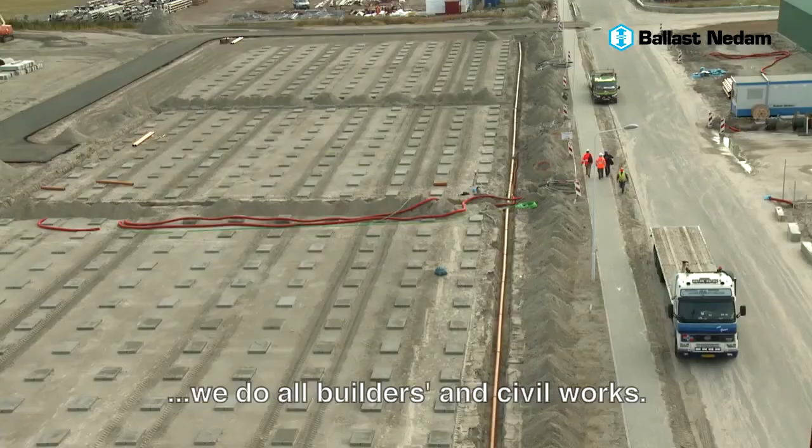Nuon is now part of Vattenfall, and this power plant is a very valuable asset in the Vattenfall portfolio. In fact, we build everything underground. We do all builders and civil works, also cooling water system. In fact, we connect the Mitsubishi turbine to the world.

I see Ballast not only as a pure construction company, but also as a service provider. Because Ballast already knows Mitsubishi's way of thinking, that's why we feel that Ballast is much closer to Mitsubishi compared with other European companies.

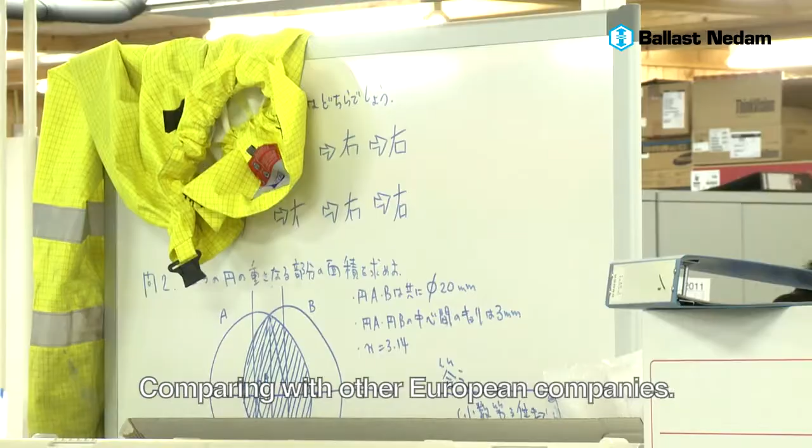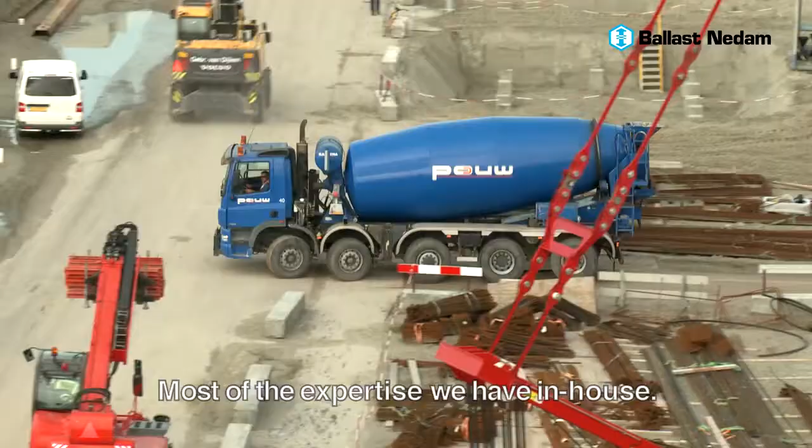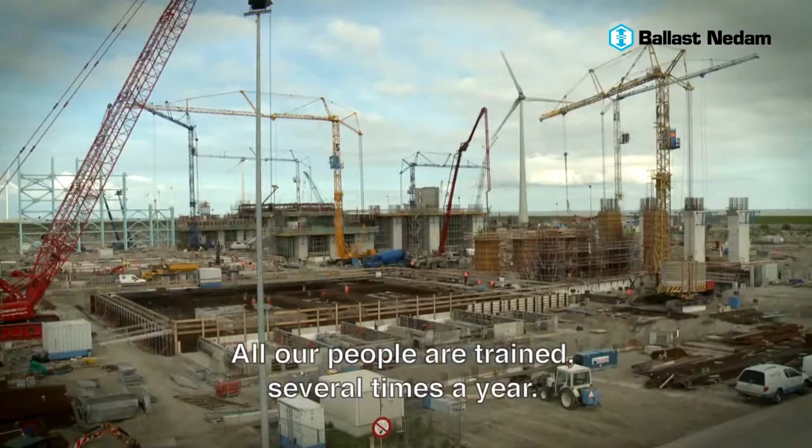We work with a limited amount of subcontractors. Most of the expertise we have in-house. At Ballast we have a severe safety program. All our people are trained several times a year, and we hope to achieve a perfect safety record at this project, because your people are the basis of a successful project.

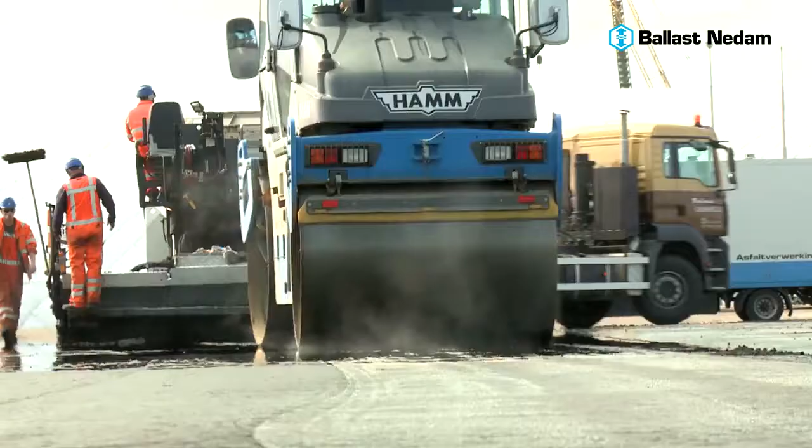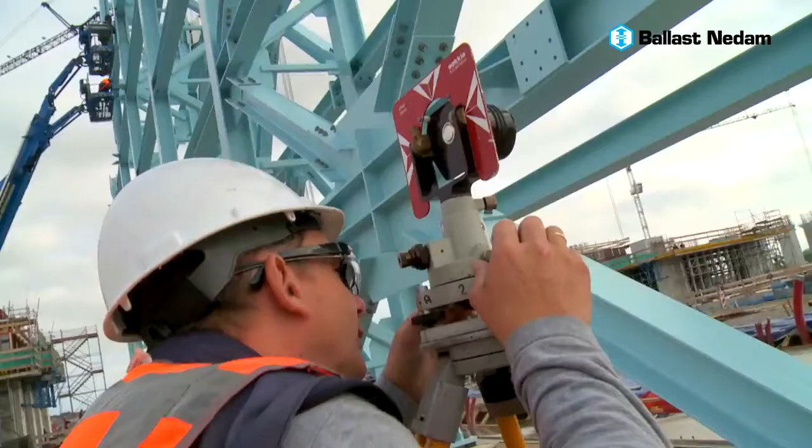Ballast is especially strong in cooling water systems. On that we have a very particular situation here, that we are very near to a nature-protected area, and Ballast was thinking together with us about the solutions for this system. All of the design works are carried out in cooperation with our client Mitsubishi. These works consist of the cooling water intake, the cooling water outfall, and the design works for the cooling water piping.

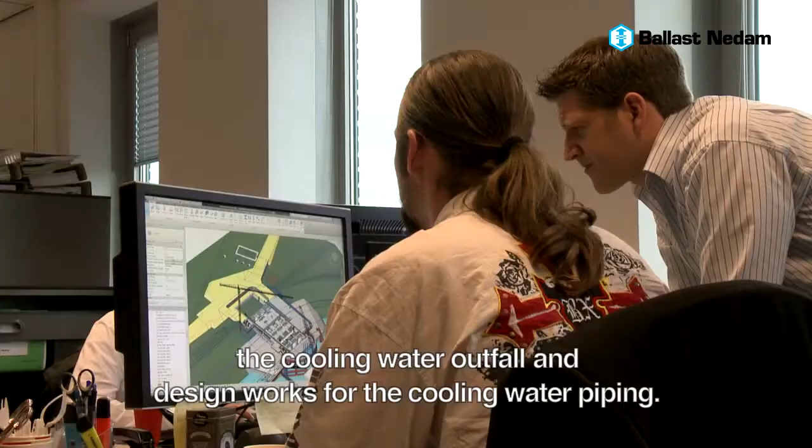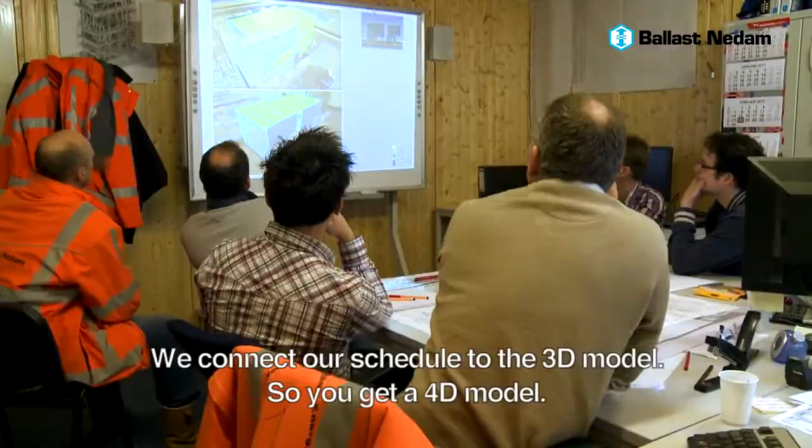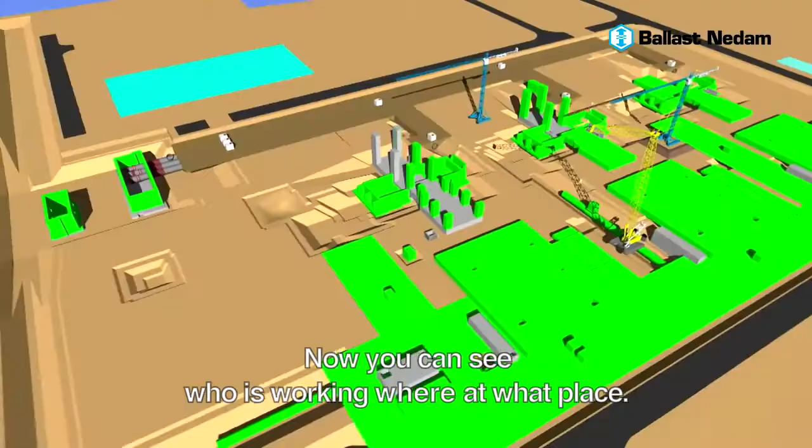We connected our schedule to the 3D model, so you get a 4D model, or BIM model - building information model. Now you can see who is working where at what place. Well, I think it's the experience of Ballast to keep the planning. They know how long things last.

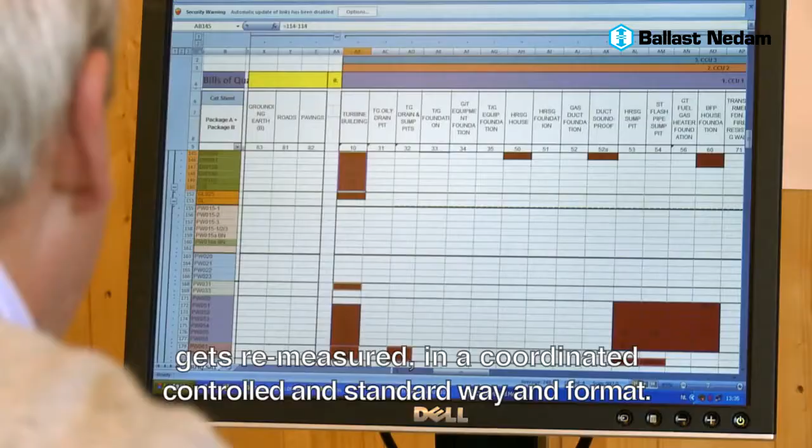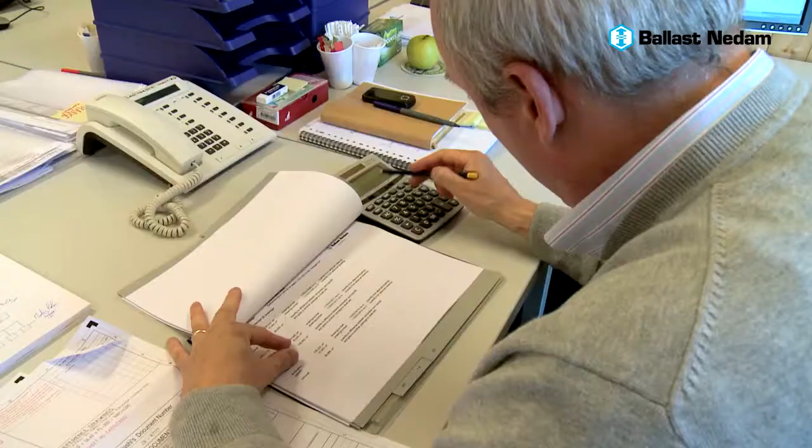So it's my responsibility to make sure that every aspect of the job gets remeasured in a coordinated, controlled and standard way and format. My personal goal is really to make sure that all the works on site are transferred from the drawings into these small baby packages, so everything's clear, so that we can present it to the client and the contractor and hopefully get everything agreed.

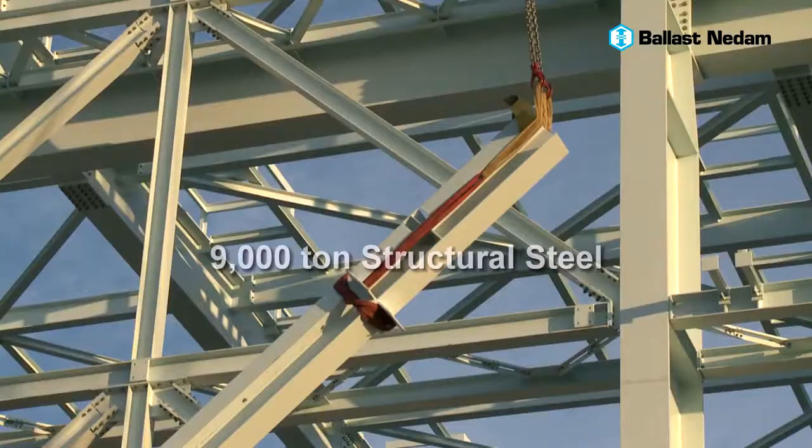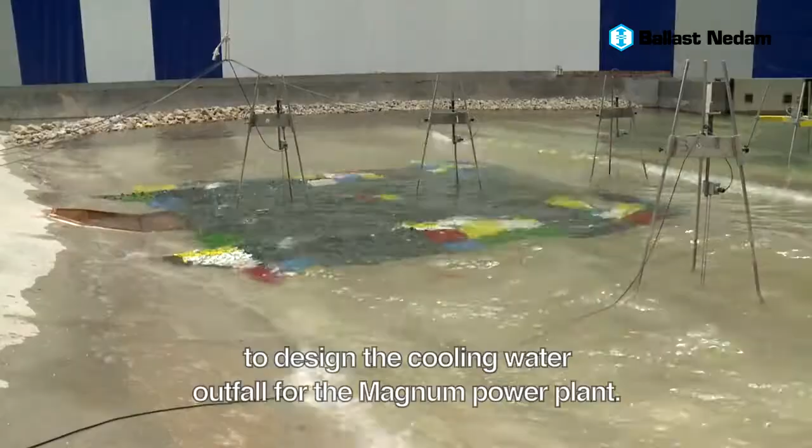Ballast Engineering works together with Deltares to design the cooling water outfall for the Magnum power plant. We model this setup here to determine whether the structure is stable and can withstand a certain design storm. We will measure the waves and also we measure the damage, which is the goal.

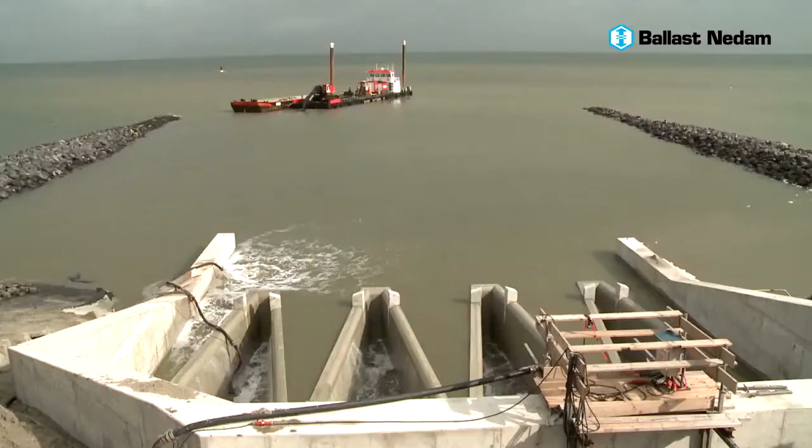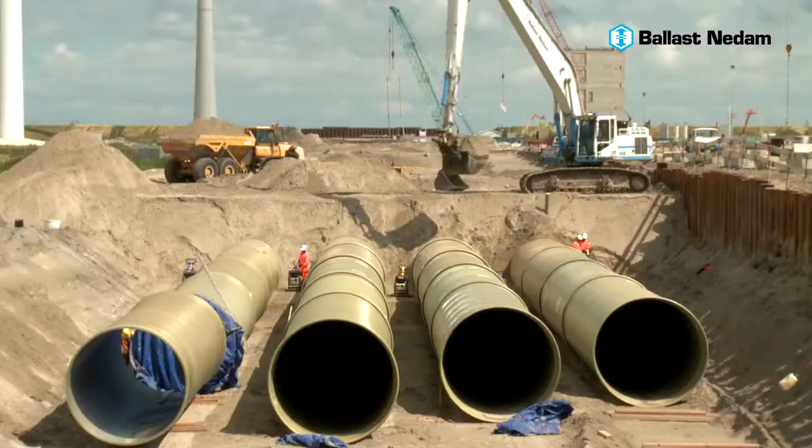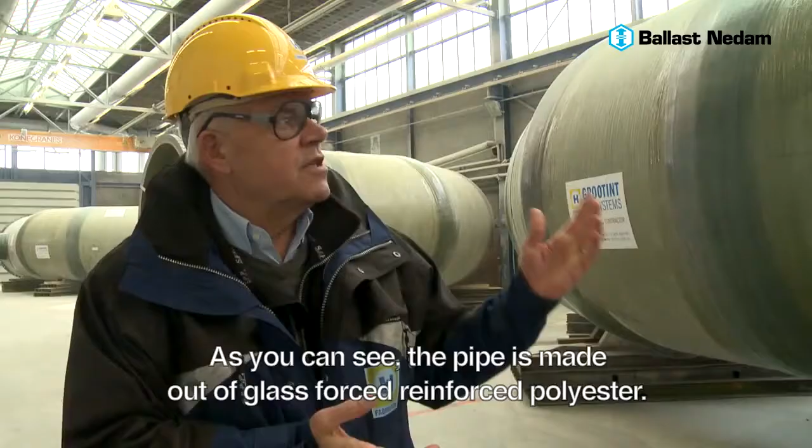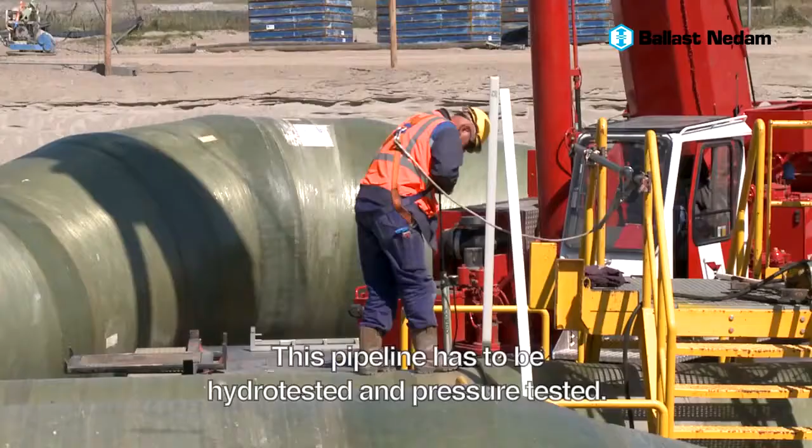Well, this GRP pipeline is the main cooling water line for the Nuon power plant. As you can see, the pipe is made out of glass fiber reinforced polyester. This pipeline has to be hydro tested and pressure tested, and this is done by Ballast also in cooperation with us. For this project, Ballast Nedam has high quality standards.

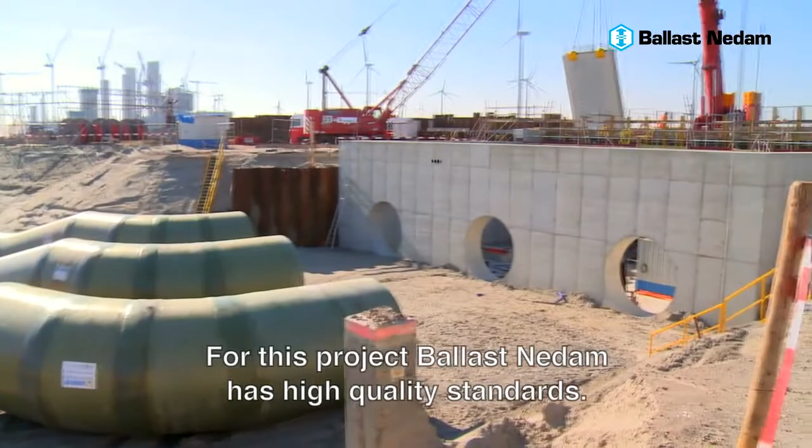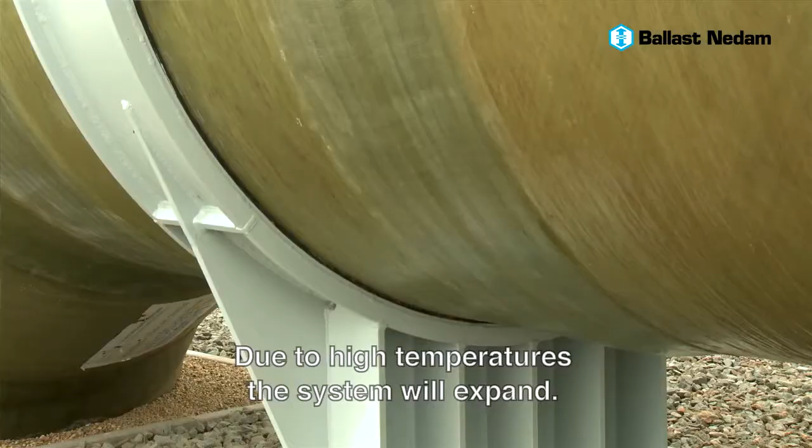Also the employer and the owner has high contractual demands. This is the GRP pipe, but this is the part which is above ground, so that means that due to high temperatures and so, the system will expand. You can see that the supports can move in all directions, so that the system will not be damaged.

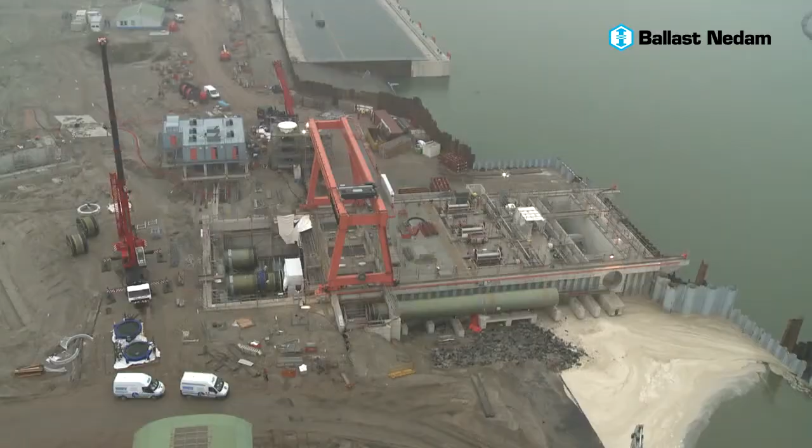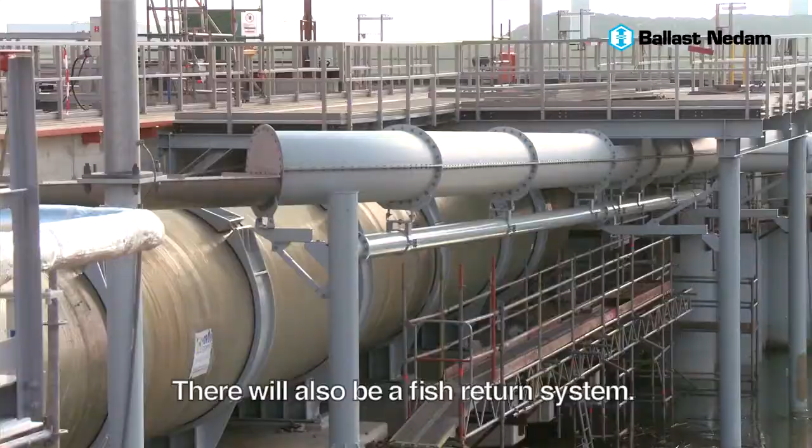This is the building which will take in the water which is required for the cooling. In the intake building itself there will be a lot of other systems which will take out the debris. There will also be a fish return system, some sort of a band screen which will take out the fish, and it will take care that they re-enter the water safely.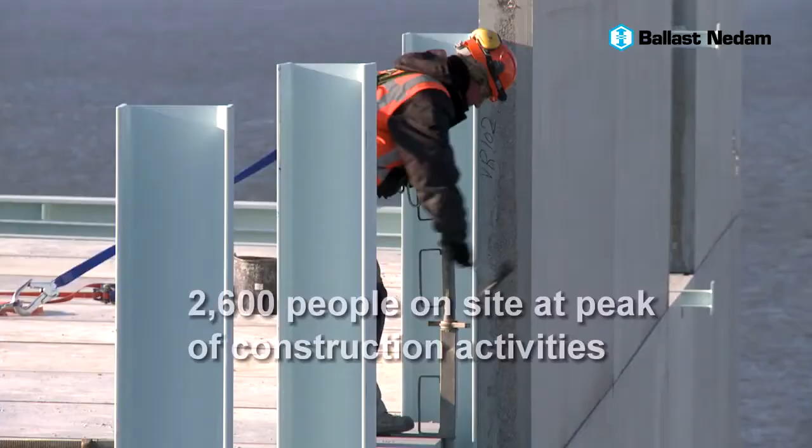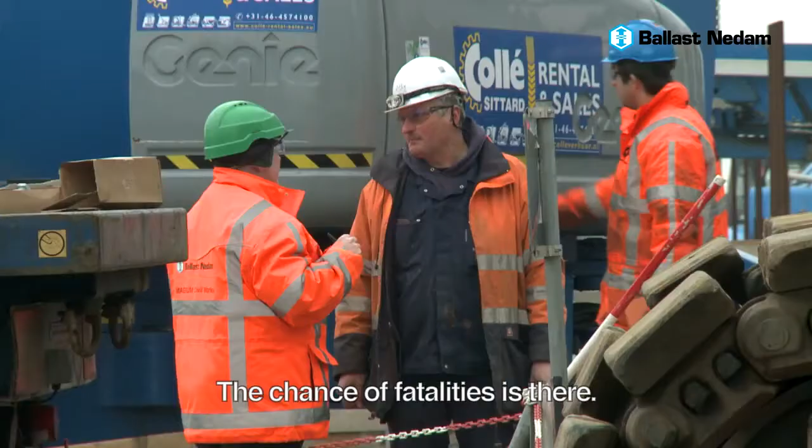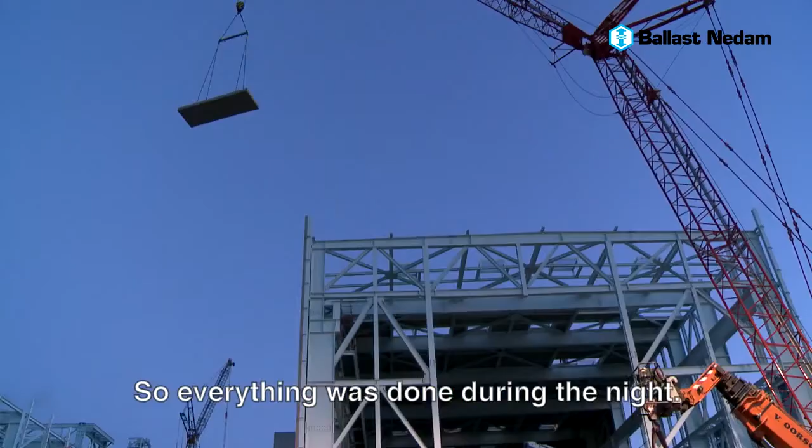Well, safety is always important, of course, because we all want all workers to go back home safely and that they not get injured or hurt in any way. The chance of fatalities is there. We live with safety all day, that's our job. Now, the roof panels were installed at night time because a lot of people were working daytime, so everything was done during the night. No one was on site except the people who had to install everything.

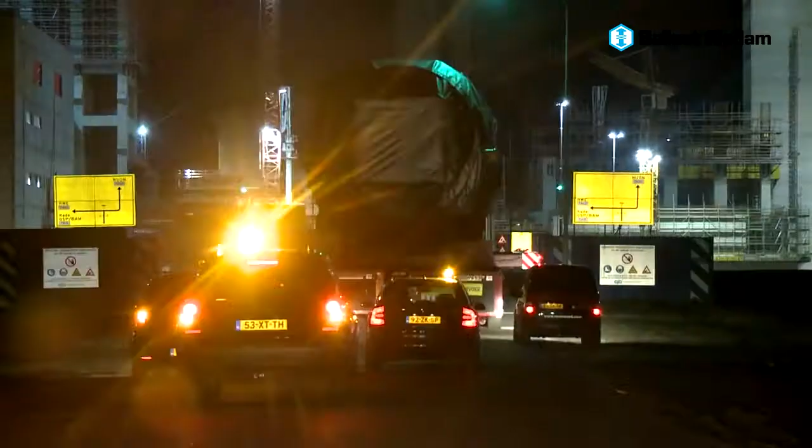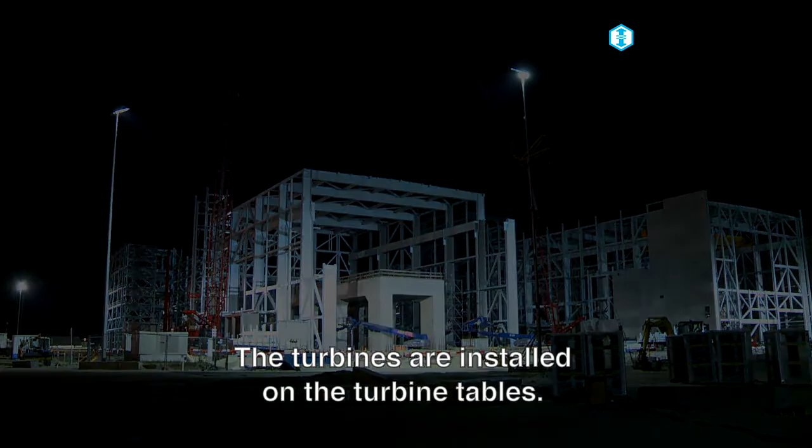Turbines are installed on the turbine tables. We put a lot of effort in pouring those tables because the measurements are very accurate. Steel plates, anchors and pipes, etc. are poured into the table.

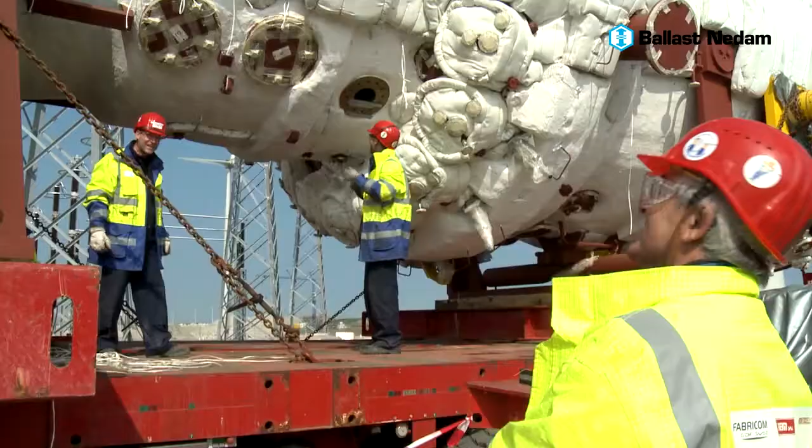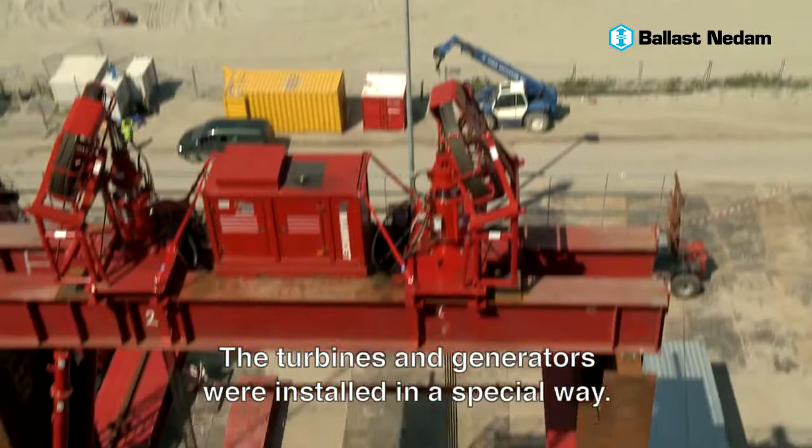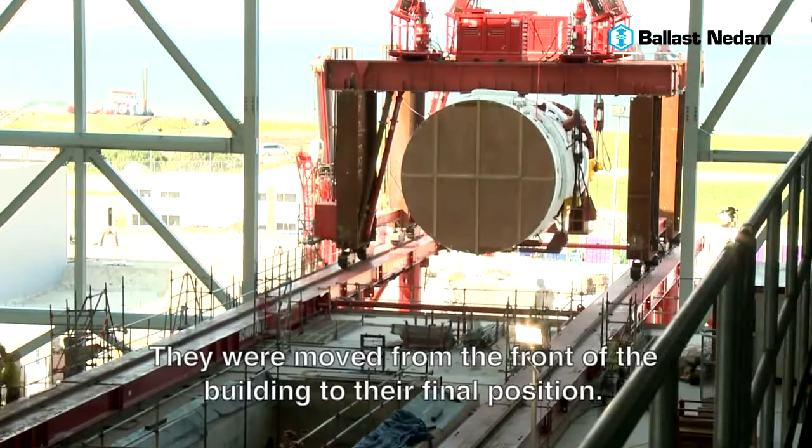Both the turbines and the generator were installed in a special way, not by lifting from the top, but they were installed with a lifting device in front of the building. Both turbines and the generator were installed horizontally by skids, and they were moved from the front of the building to their final position.

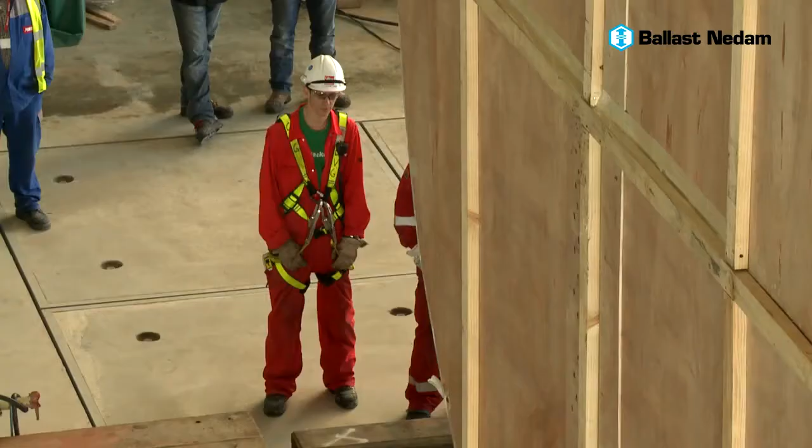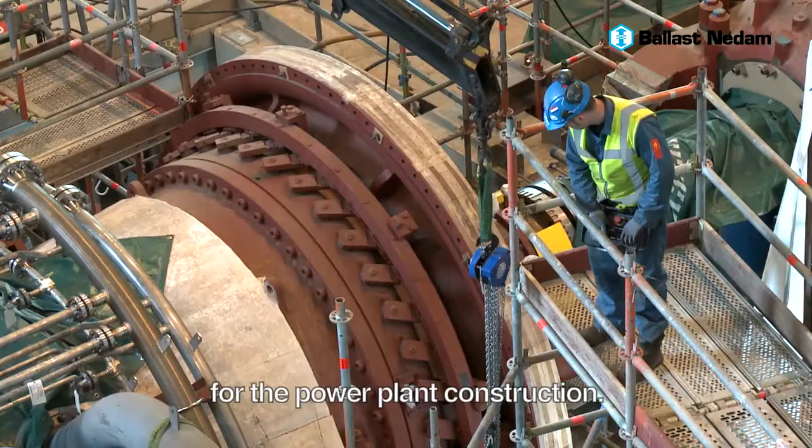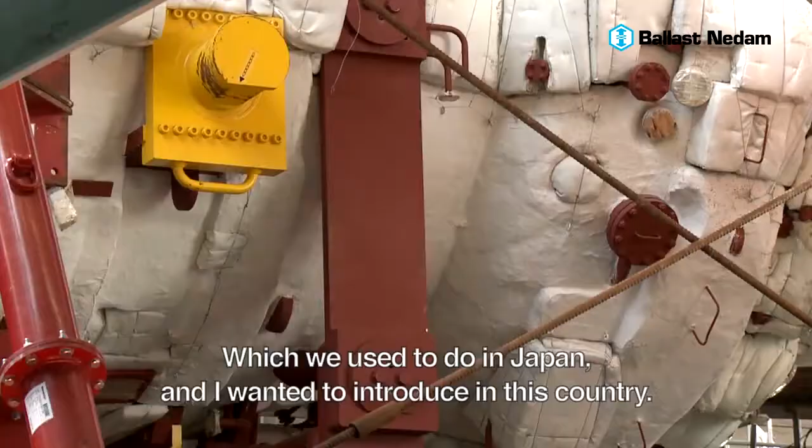Of course, Mitsubishi is a manufacturer of turbines, so for us the installation of the turbine is one of the major milestone dates for the power plant construction. In April, we successfully installed the first turbine, so that's why we arranged our Japanese style, so-called Shinto style ceremony, which we used to do in Japan. And I really wanted to introduce it in this country.

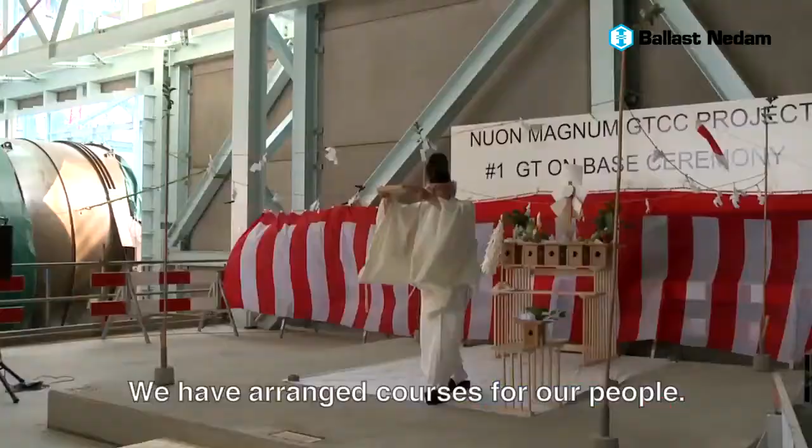We are working with a lot of different nationalities and cultures on this project, and especially to get a better understanding of different cultures, we have arranged courses for our people. Anyway, installation of the turbine is just a starting point for us to start the mechanical work, so the meaning of that ceremony is to wish for the safe execution of the following work.

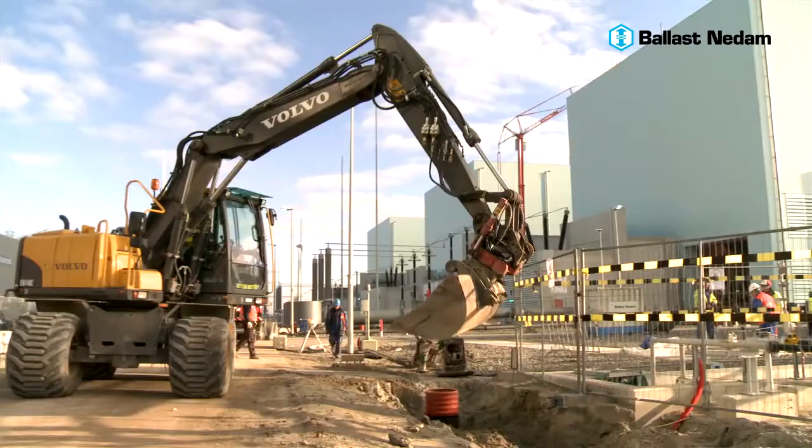As you can see, we have almost finalized the works. Asphalt is progressing very well, and we hope to finalize all the works within 4 weeks. Even at the end of the project, safety is always a priority. Client satisfaction is our goal - if we don't have a satisfied client, we don't have a successful project.